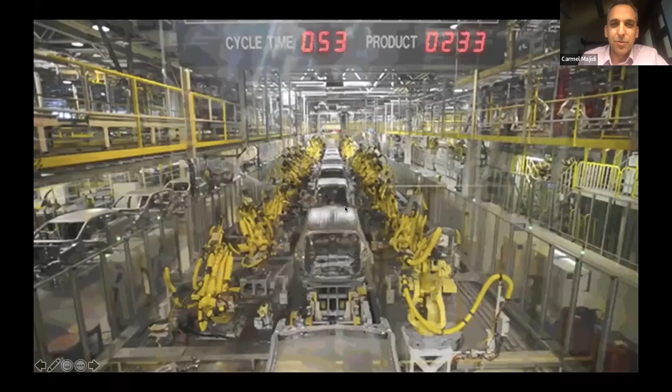So let me share my screen here and I'll get started with my presentation. I want to just start by saying that this presentation is going to cover soft robotics at a fairly high level.

I'll sprinkle throughout some of the work out of my research group. At this point, soft robotics, or what we term 'soft-botics' here, is really a global initiative, and CMU is one of the leaders in a lot of the pioneering work. Even since the inception of a lot of the current efforts in soft robotics, that happened here at CMU. I'll talk about how some of the work out of CMU weaves into this, and John mentioned the new Scaife building, so at the end I'll also talk about how central that's going to be for accelerating a lot of the work we do in this domain.

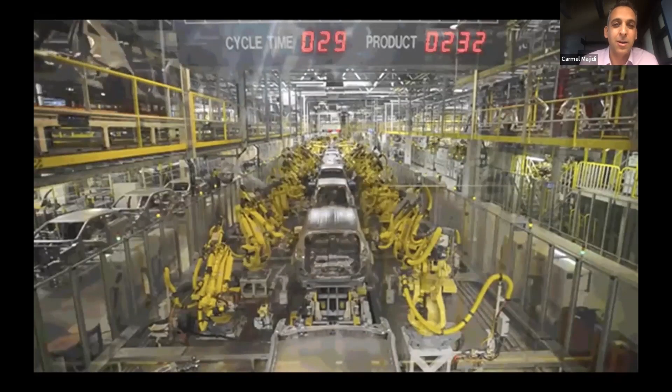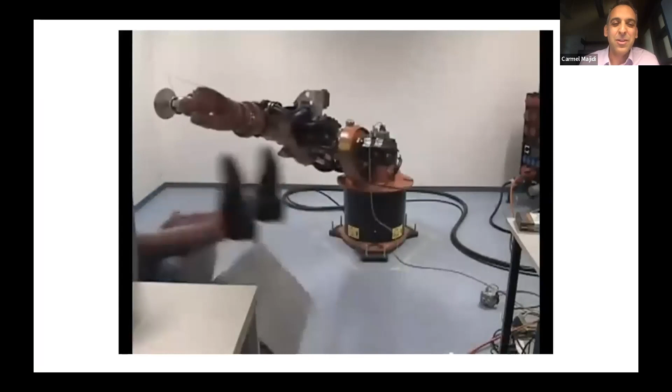Soft robotics, robotics as we know, has a central role in a lot of different industries in our economy. They're absolutely critical, vital for a lot of what we do. A lot of these machines, these robot arms you can see here, are highly well engineered for the tasks they're designed to accomplish. Now, of course, these are pretty bulky, load-bearing, powerful systems. Oftentimes they work behind cages. You certainly don't want these in close proximity to humans. You definitely don't want these robot arms in your kitchen, right? These are really not designed for interactions with humans in a close proximity role or an assistive role.

And really that's where soft robotics and this concept comes in. Can we re-engineer machines and robotics that are used in automation in a way that they can actually be more engaged in our daily life? So engineer them in ways that they can assist with mobility, that they can aid with human-computer or human-machine interaction. We can use these for healthcare, for health monitoring.

When we explore the role of robotics for applications that require intimate contact with the human body, we're faced with a lot of challenges in the materials domain. When we think about robotics, we think about many disciplines, not just hardware, but also AI, computer vision, and the more algorithmic sides of robotic systems. But there are also materials challenges that emerge when we interface these automated systems with the human body.

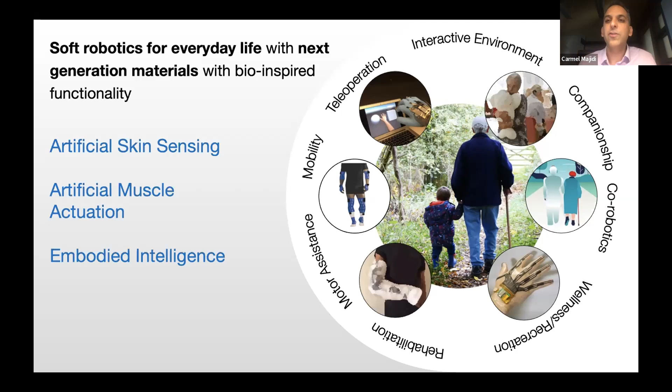We want to think about next generation material systems that function like artificial sensing skin, artificial muscle, or artificial nervous tissue for embodying intelligence within these systems. Of course, the big challenge is that existing materials used in engineering don't have any of these functionalities. They're for the most part passive from an actuation standpoint.

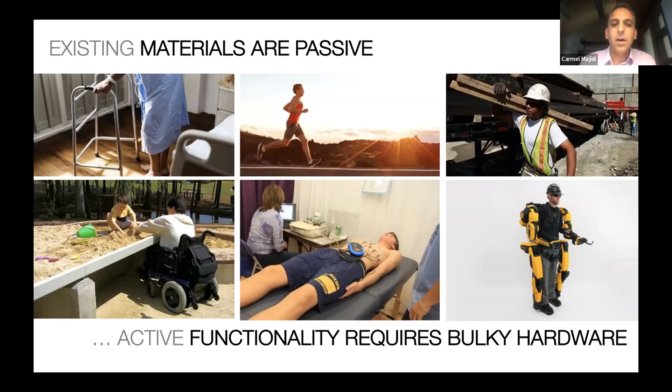They can be load bearing, or we can use them in garments to provide comfort and protection. But if we want to engineer any kind of electronic functionality, any kind of robotic or actuator type functionality, we end up with systems that are quite bulky and not compatible with everyday life. If you think about everything from mobility to wearable electronics, like you can see here in the bottom middle panel, these are devices that would interfere with our ability to do day-to-day tasks.

This introduces a new paradigm in engineering, which I call soft matter engineering. This is something that in the earlier days of soft robotics I was advocating as an important pillar of this field, and that is to really rethink the types of materials that we use in engineered systems.

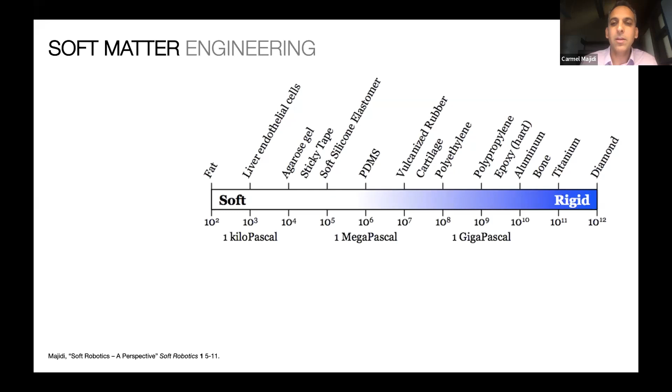One way to think about materials and their compatibility with the human body and our natural day-to-day activities is to think about how stiff these materials are. How much force does it take to stretch these materials? Or alternatively, if we put these materials in our clothing, or in robots and machines that we interact with, how much force do they push back with when we come in contact?

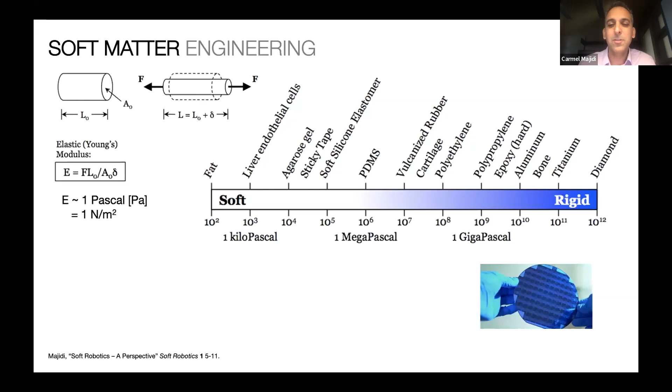The reality is that most engineered systems use materials that are orders of magnitude stiffer than the soft, squishy materials that make up our body. That's what makes a lot of automated robotic systems quite dangerous for physical contact with humans. This vast mismatch in stiffness between the hard plastics, metals, semiconductors, and hard case packaging that goes into conventional hardware versus the soft squishy tissue that make up our body.

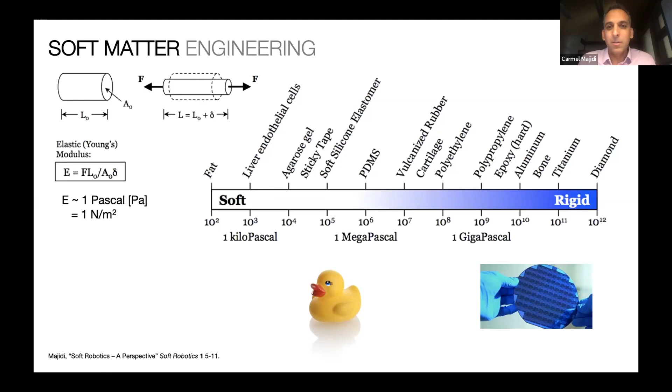The goal here is to carefully re-examine the types of materials we use to engineer systems, and see if we can achieve a lot of the same robotic, computing, and electronic functionalities that we historically achieved using rigid materials, but instead using soft materials: rubbers, gels, granular materials, things like sand or powders or fluids.

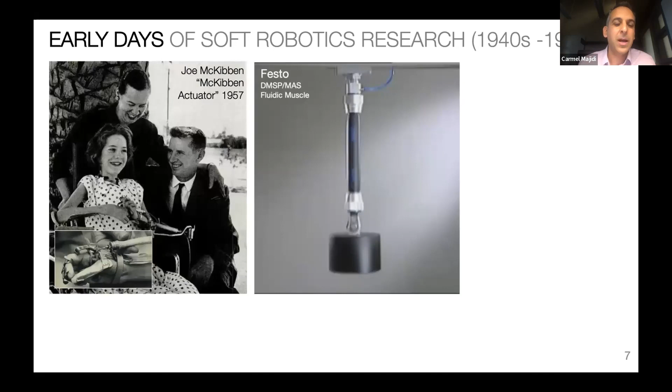A lot of the early, pioneering work in soft robotics actually started out here at CMU. However, if you really want to make a stretch, you could argue that the inception of soft robotics goes back many decades, to the 1940s and 1950s, with a lot of the early work using pneumatics in automation and robotics.

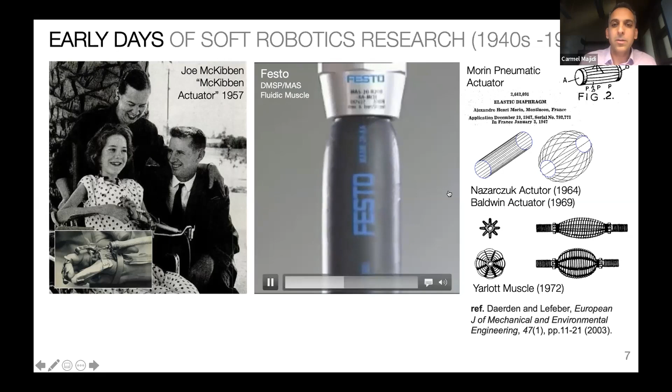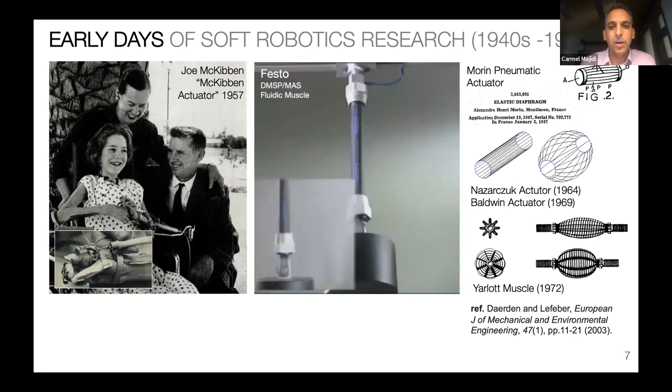There's a really long history of using basically balloon inflation and pneumatic power to create these fairly simple and somewhat rudimentary linear actuators that have been used for applications like robot arms, and also in industrial automation with conveyor belts and hoppers, but also, as you can see here on the far left, using these soft pneumatic robots for a hand exoskeleton.

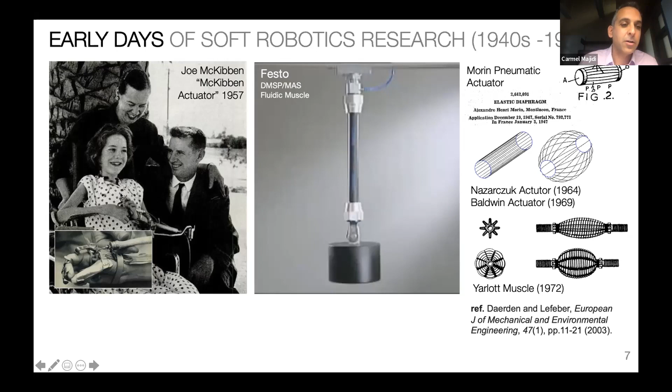This is actually Joe McKibben, a physicist who's credited as being one of the pioneers of soft robotics. He built this hand exoskeleton using pneumatic actuators for his daughter, who was suffering from motor disabilities.

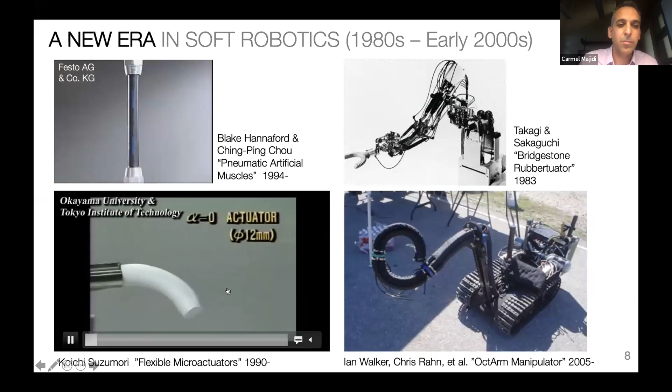In the decades since, there's been an expanded look at these different types of pneumatic actuators for different applications - mobile robotics, robot arms, industrial automation - looking at different form factors and shrinking these down. Within the past two decades, we've seen tremendous growth in institutional funding for soft robotics, basically a rediscovery of these types of soft material systems for applications in robotics. That leads us to where the field is today.

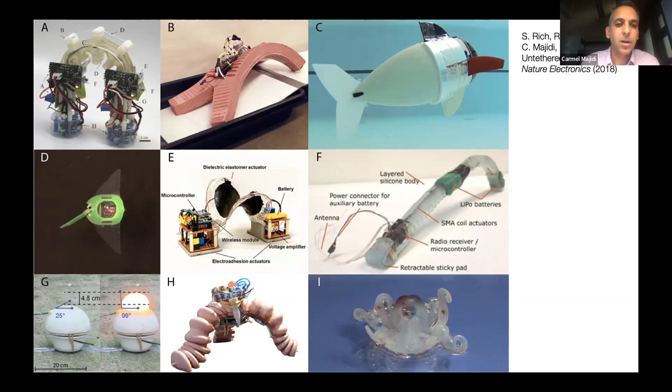There are all sorts of really exciting approaches and designs to building machines and robots that don't use any motors, none of the conventional hardware we typically associate with motorized systems and automation. Instead, they use alternatives to motorized actuation. Pneumatics is one, but there's a host of other actuator technologies out there. I'm going to go through these rather rapidly, just to give you an overall flavor of the current state of the field and the methods used to power these systems so they can have robot functionality while still being made primarily out of soft, squishy materials - safe for contact with a human and able to mimic the properties of soft natural organisms.

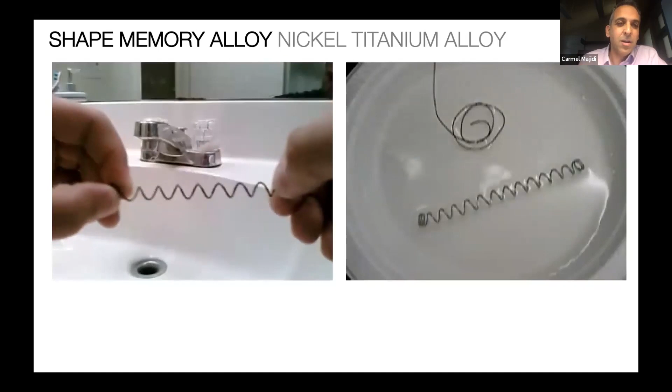I'll start with shape memory alloy. That's been a really popular material in soft robotics. Some of you might already be familiar with materials like nickel titanium that have this shape memory effect. At room temperature they're quite compliant and deformable, but when you heat them up, they spontaneously go back to their original shape.

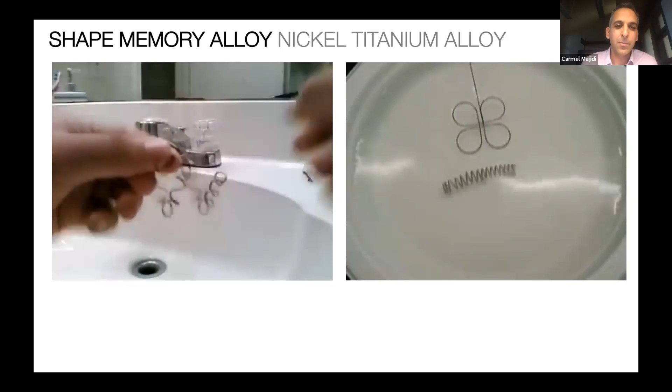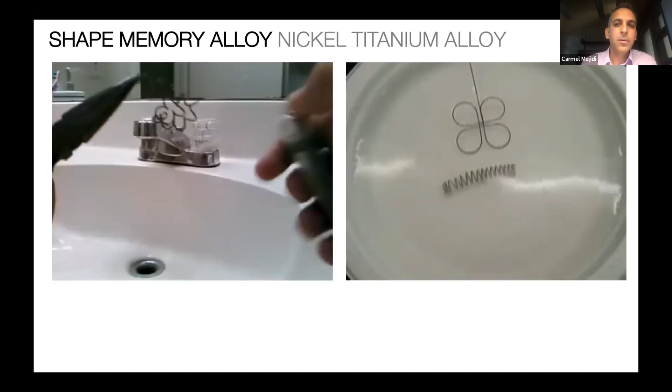You can see this in the video here on the left. It's very malleable - you can deform it, uncoil it - and then when you bring a flame to it and it heats up, the material had memorized its previous crystal structure and spontaneously goes back to that shape upon heating. The wire remembered that it was a coil and goes back to that shape. Heating is, of course, one way to do this - here we're showing the same effect in a hot water bath.

But the approach we take in our group and other groups throughout the world is, instead of using external heat, to use electrical input. We pass electrical current through that shape memory alloy, and through the Joule heating - the resistive heating from that current flowing through the wire - that's enough to create the temperature needed to induce this shape memory effect.

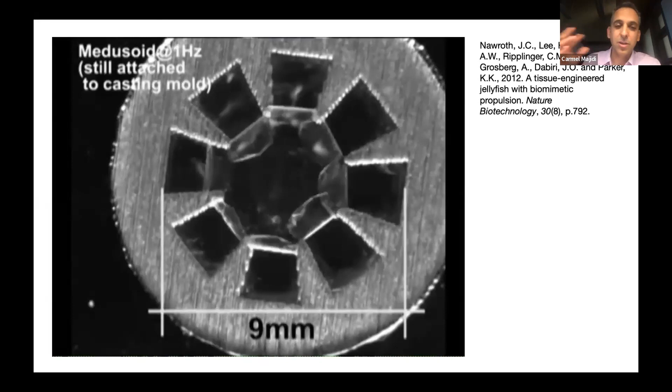Another really popular and exciting approach to actuation is to use biohybrid type systems - taking natural muscle tissue and combining it with soft materials to get robot motion. Adam Feinberg over in the BME department has been one of the pioneers in these soft biohybrid systems, combining natural tissue - in this case skeletal muscle from mice or cardiac myocytes and cardiac tissue from a rat's heart - and incorporating that into soft material systems to get these robots to move.

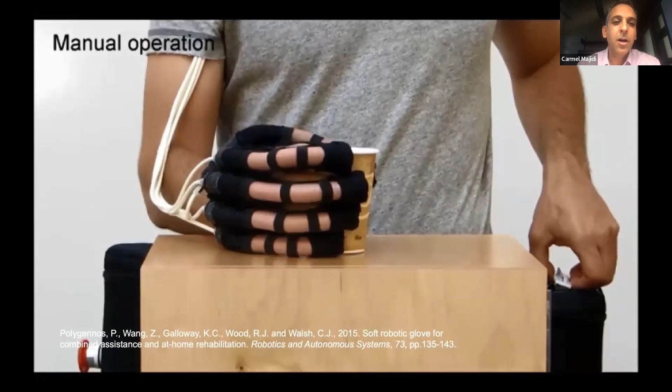I'll kind of breeze right through - we'll have time during Q&A to come back if you want to learn more about the details. I really want to highlight some of the applications of these material systems. As I said, one of the pioneers of soft robotics was a physicist, Joe McKibben, and what motivated him was to make a hand exoskeleton for his daughter. That continues to be a motivation for the field.

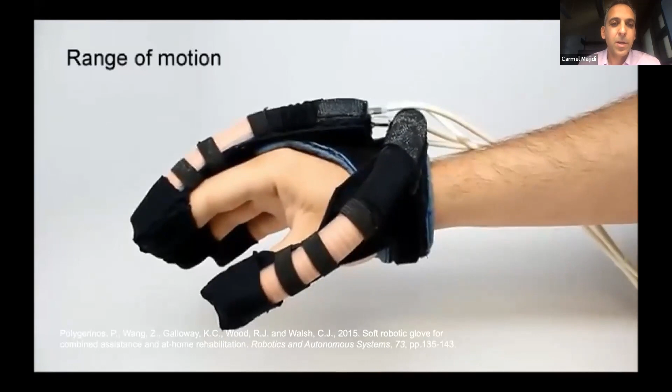This is work out of Harvard University, Conor Walsh, using these kinds of soft pneumatic actuators to assist in hand motion - this is really intended for rehabilitation and assistance for patients who suffer from motor disabilities.

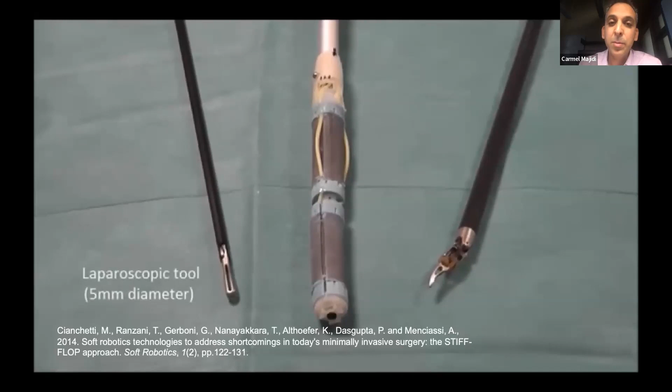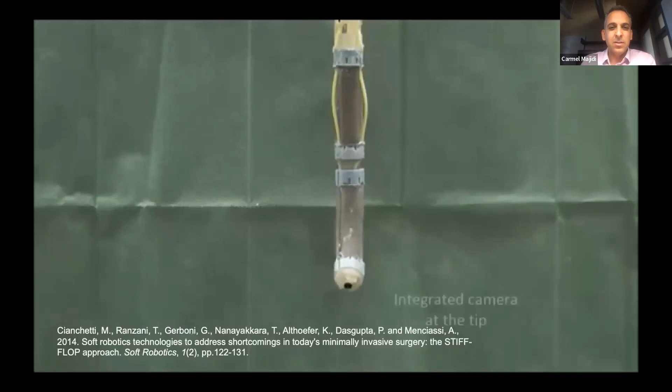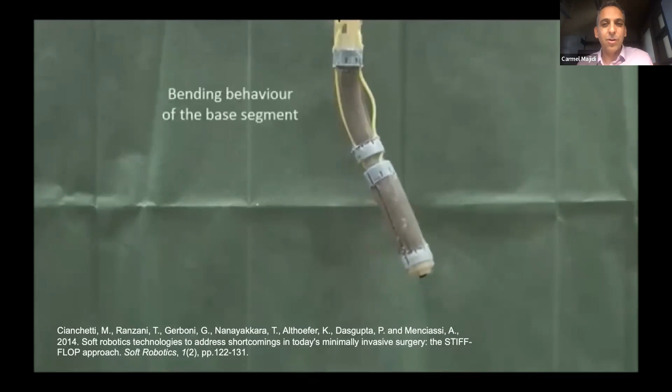Here's another video of using soft robotics for a medical endoscope. Minimally invasive surgery is another big motivation for soft robotics. Because these materials are soft and deformable, we can put them through arteries and have them in contact with organs without worrying about high stress concentrations that might arise from mismatches between the stiffnesses of the contacting materials. By using materials that match the stiffness of our natural arterial tissue and organs, we can reduce those stress concentrations and ensure safer contact.

And so these systems are still very much a work in progress.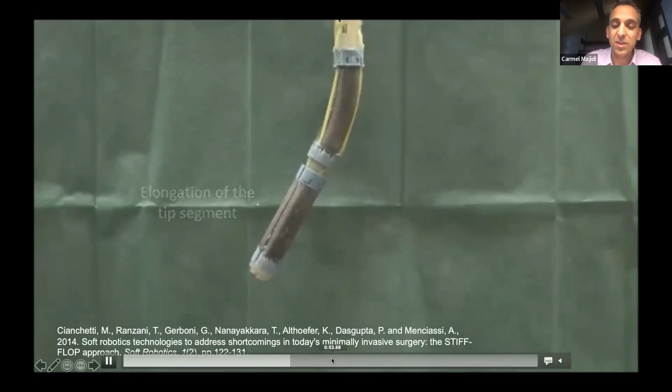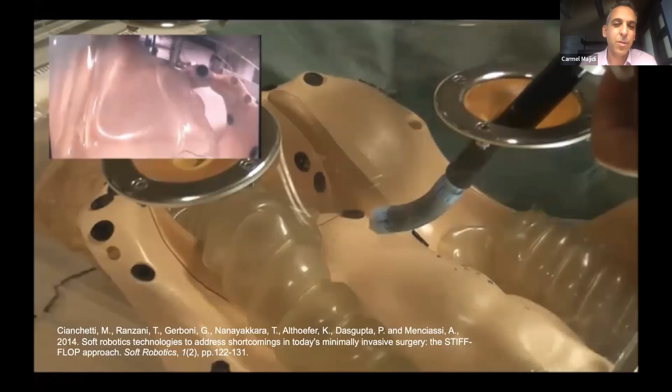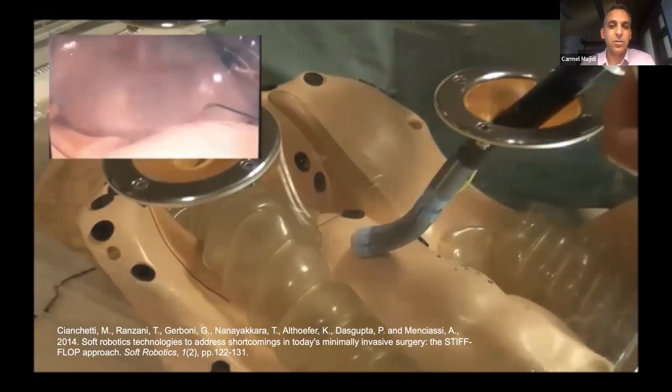I'm not aware of any actual surgical operations that are routinely being performed using soft robotics. Although there are every year millions of balloon angioplasty operations, and you could argue that those, in a sense, are a form of soft robotics because they also use inflation and soft materials.

In that case, to basically remove any plaque from arteries. Here's another example of a popular area of research exploring the use of soft robotics in medicine. This is work by Metin Sitti, who is a former member of the MechE department here at CMU. He's now at the Max Planck Institute, and he, along with plenty of others, have explored the use of soft magnets to create these little robots that can crawl around and move inside the human body.

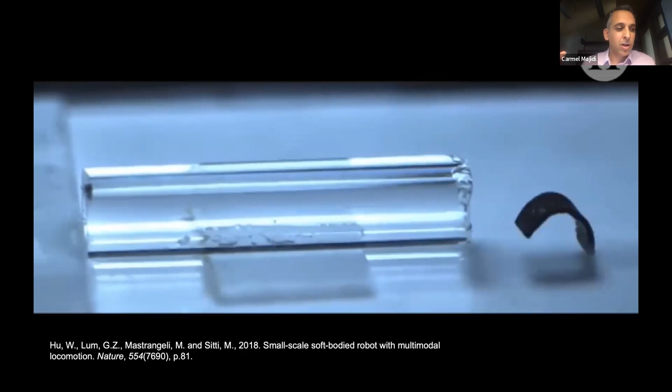What's special here is that we basically get this untethered type of interaction between these external electromagnets that are outside of the body, and then these kind of soft, rubbery magnets that can be placed in, say, in the stomach or in different arteries or organs.

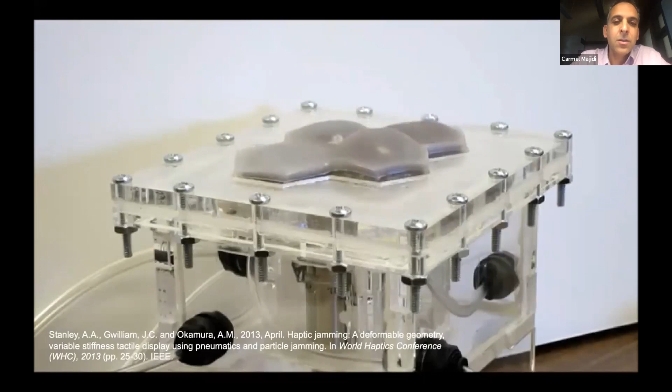This is just one of the last application demos here. This is work out of Stanford University using soft robotics for haptic interfaces. And this is something also that we're doing quite a bit of here at CMU. I think this represents one of the important application domains where soft robotics does offer some unique advantages over a lot of more conventional hard-cased electronic technologies.

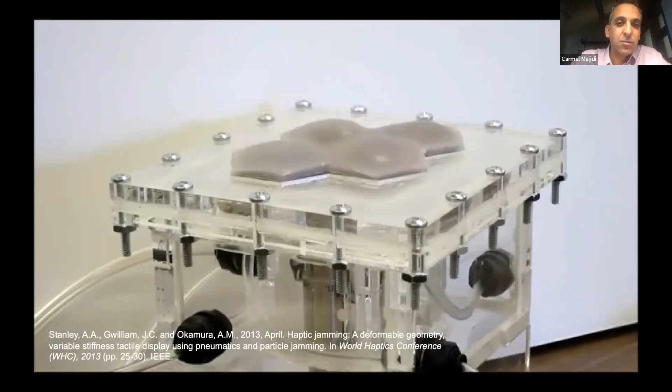Here, we're using pneumatic inflation, or I should say we're using pneumatics not just for creating shape change to create these different textures and surfaces for haptic feedback, but we can also use pneumatics for stiffness tuning. So if we put particles within these rubbery chambers, and if we apply suction, then that can actually cause those particles to compact in. And that's a way of achieving stiffness.

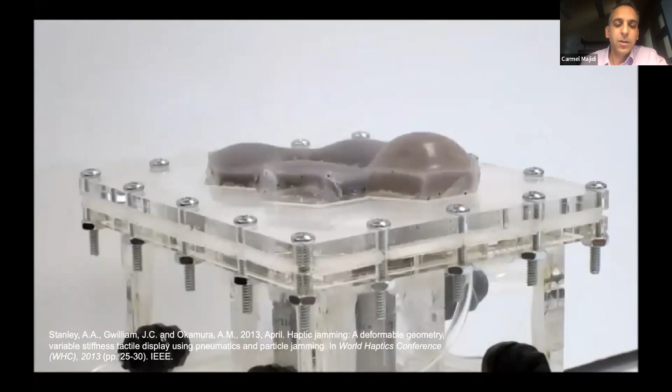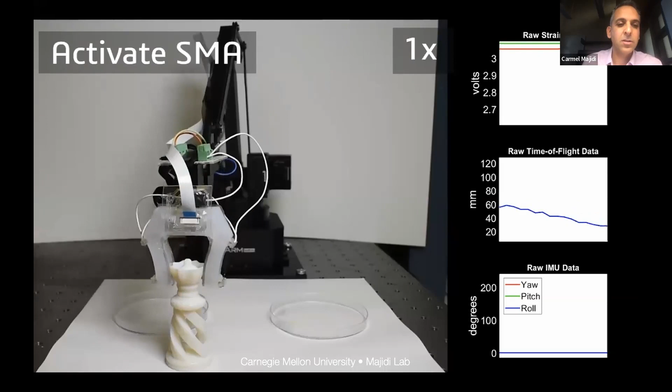And then this is just wrapping up to some work out of my lab where we're incorporating soft sensors into these robot grippers. Again, this one is powered using shape memory alloy. And by using these soft sensors and soft electronics, we can endow these soft robotic end effectors with this feeling of basically touch and a sense of proprioception, or a sense of motion and orientation.

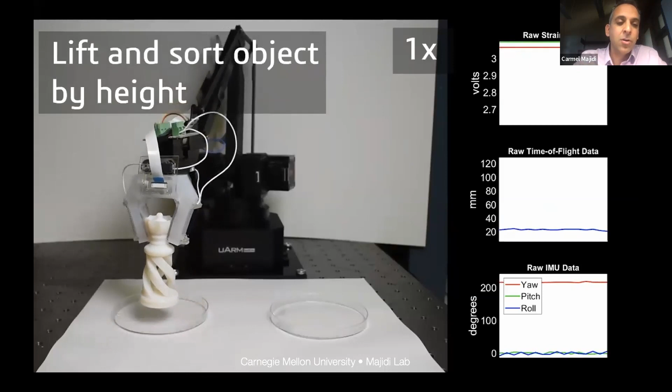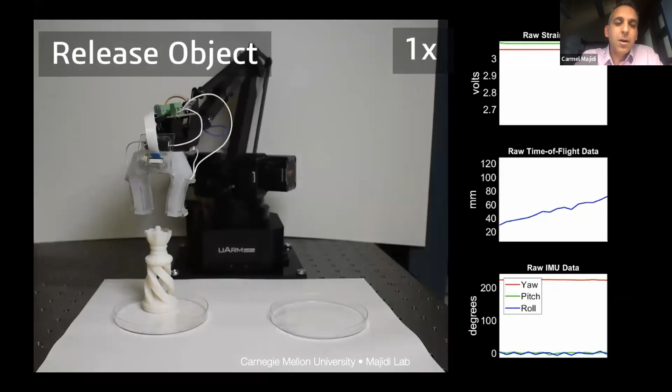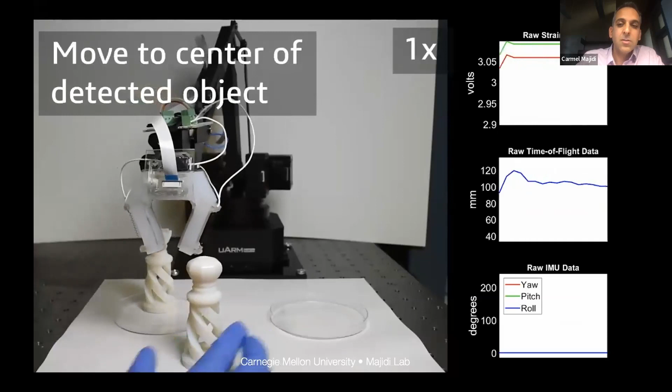So the types of electronics we use here are based on liquid metal. So instead of using just conventional copper or gold traces, we're using metal alloys that are liquid at room temperature. And so this allows for kind of fluidic circuits that can conduct electricity, that can themselves function like sensors, so in this case, touch sensors, but then we can also wire up different microelectronic chips like an IMU for measuring motion.

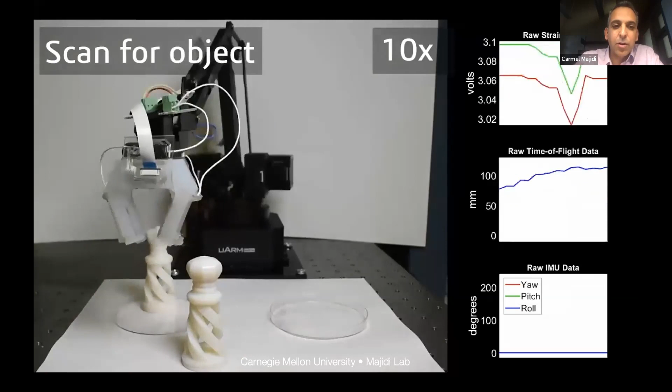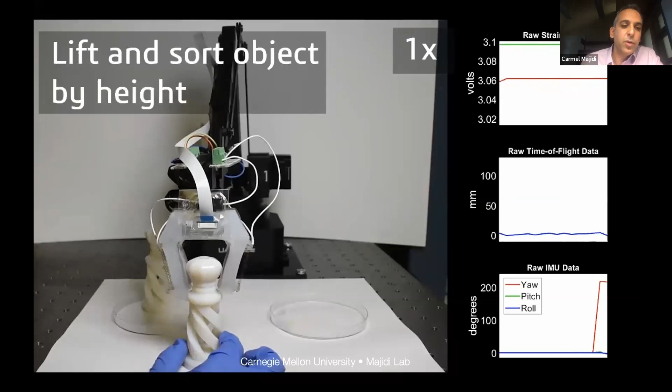We have a little light-based time of flight sensor to scan the location of objects. And by incorporating sensing into these soft robots, we can basically make them much more robust. And so when we introduce disturbances, if we say move an object around, or if we try to pull it from the grips, the sensors will pick that up and the robot will know to go and reattempt the grasp.

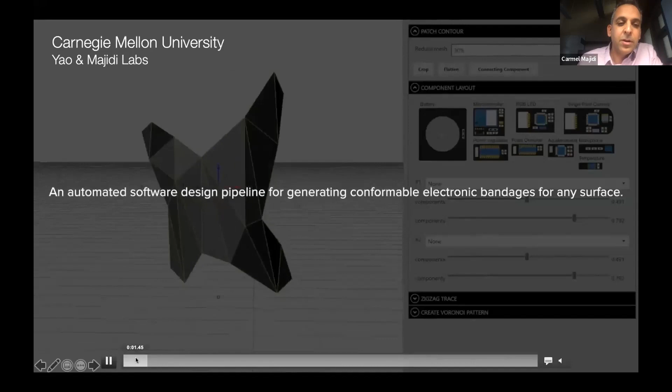Naturally, a lot of these soft and stretchable sensors and electronics are not just useful for applications in robot grasping. Here's just another video of work, this in collaboration with Lining Yao's group over in the HCI Institute, where together we looked at using a lot of the same material architectures and manufacturing methods used in soft robotics now to create these kind of sticker-like sensing electronics. I'll just kind of skip ahead here.

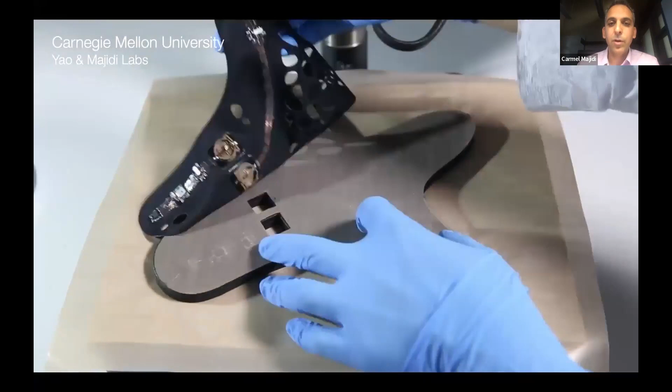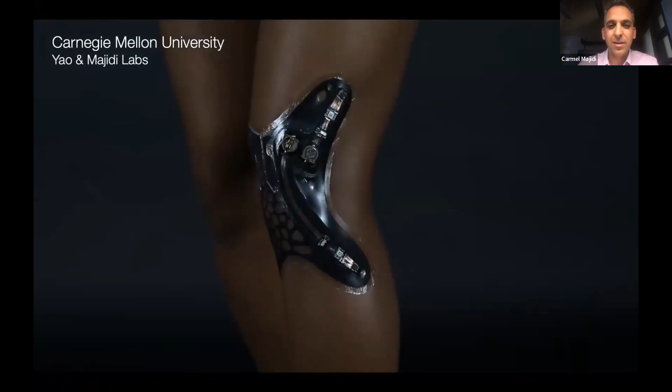That can be used to basically create these kind of fully wireless circuits that we just adhere to the body, and we can use for all sorts of different modes of physiological sensing. So here's just an example of a sticker. It has its batteries, it has its microcontroller, it has a Bluetooth radio, and then it has IMUs, so we can track, say, the motion of the knee.

The electronics themselves are quite robust, quite stretchable, so we can put them into garments, we can put them on our skin, we can move around, and they don't really interfere with our natural motion. The electronics will stay intact. And we can incorporate acoustic sensors. If you want to, say, track food intake, we can put temperature sensors, pulse oximetry chips. There's a whole range of different types of sensing modalities that we can engineer into these.

So I have about 5 minutes left, and I'm going to spend a little bit of time just talking about the impact of this field and also kind of translation into the commercial and entrepreneurial space. And John, in the introduction, he kindly mentioned just some of the translational work that my own group is doing.

So I wanted to end by talking about some of the stuff that we're doing with commercializing some of the technologies that we're developing here at CMU.

From an academic standpoint, there's been tremendous growth in the field. If we just look at the number of research publications a year, that's been growing almost exponentially, and it really has picked up over this past decade, once a lot of institutional funding agencies like the National Science Foundation and DARPA stepped in and started really focusing on this as an emerging field.

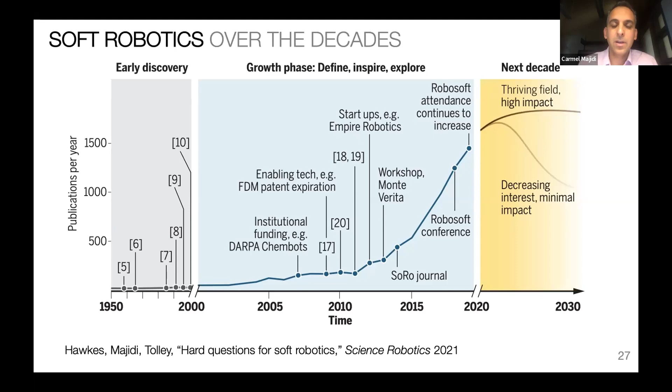We can also look at international conferences and the emergence of journals focused on this theme of soft robotics. It's been an incredibly productive and successful time period for a lot of faculty.

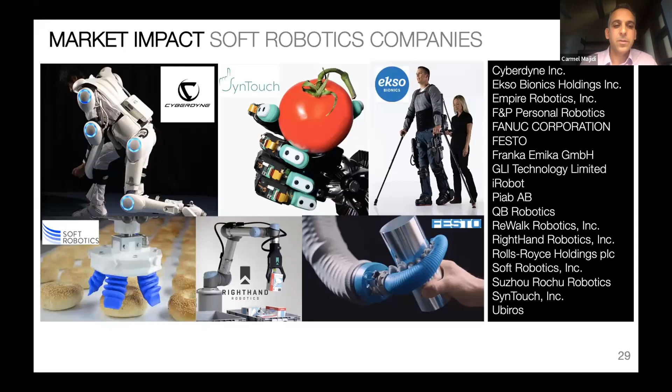But more important, it's also created tremendous opportunities for companies, both established companies as well as startups, including CMU spinoffs, that have found ways of harnessing a lot of these soft robotic technologies and soft electronics to start making real world impact, from human motor assistance through wearable devices and exoskeletons, all the way to different types of uses of soft robotics in industrial automation and robot grasping.

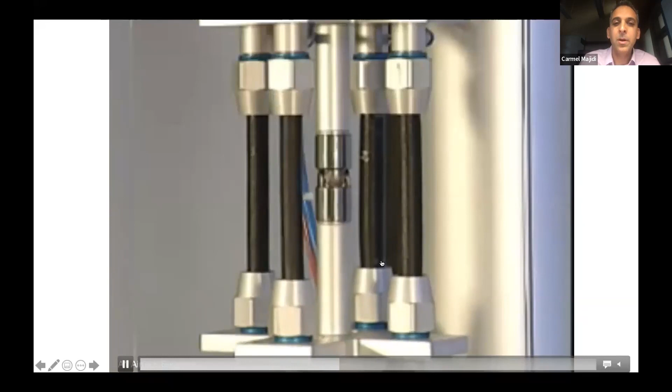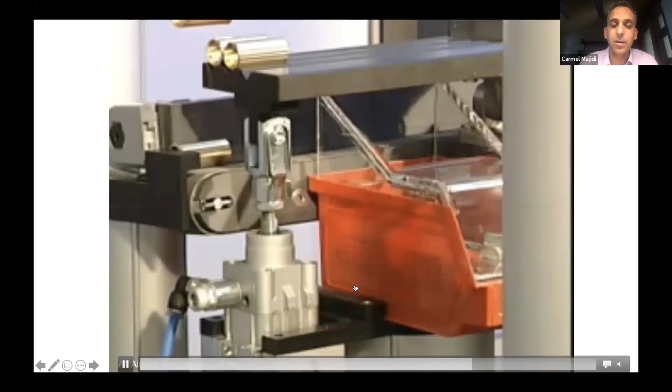I'll just show a few highlight videos here. This is using more traditional pneumatic actuators that have been around for a few decades now. I'll skip ahead here—this is used for this precision stage. These pneumatic actuators have force-controlled motion of various end effectors used in automation. Systems like this are being used today in industry.

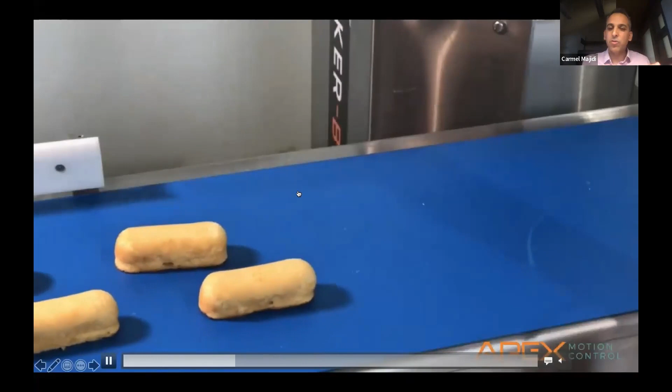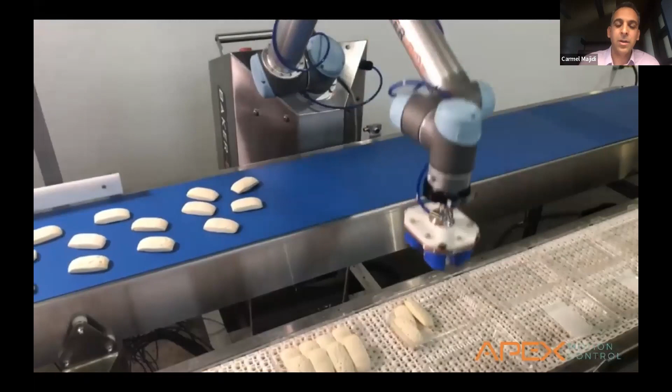Something that's been growing in popularity lately are these kind of soft robot end effectors. Instead of using those more traditional pneumatic actuators I showed you in the last video, they have these rubbery, soft fingers used primarily to perform pick and place operations on very delicate objects—like baked goods and ripe fruits, things that would otherwise get crushed if you tried to handle them using a parallel plate gripper.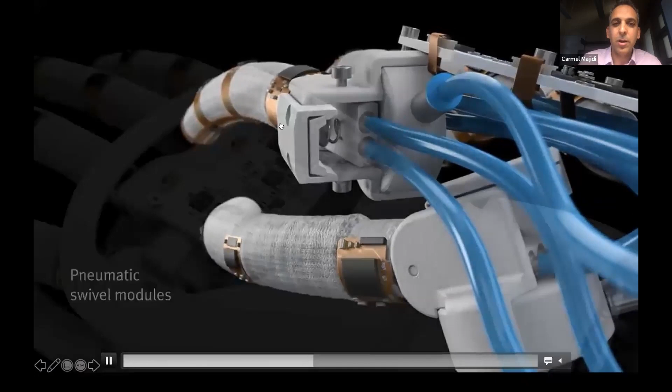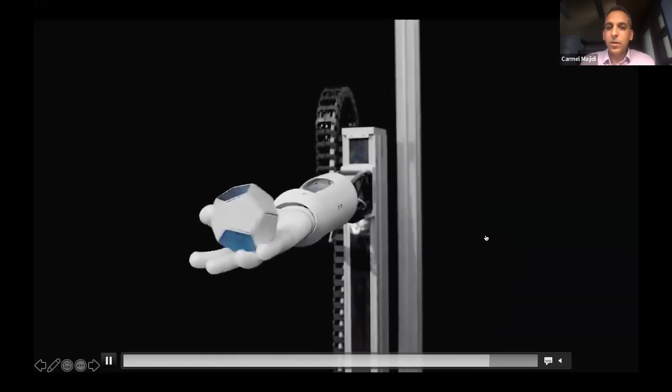Let me just kill the audio on this. This is from a company based out of Germany that's really pushing the envelope in terms of integrating soft robotics and stretchable electronics and sensors for creating these kind of bio-inspired robotic systems. I'll skip ahead so you can see the robot at work. By moving away from motors and conventional electronics, we can start engineering robotic systems that are quite compliant, soft, and lifelike.

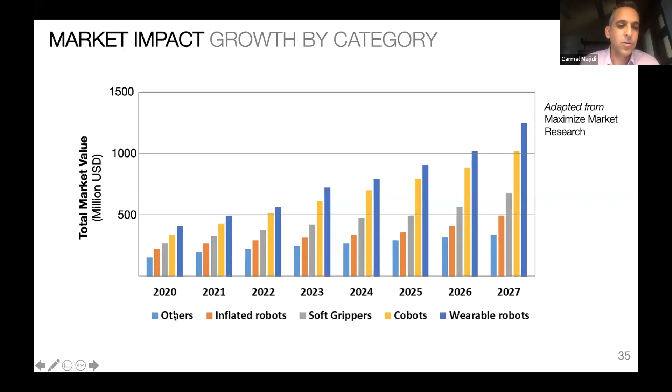In the interest of time, we have about a minute and a half left, so I'll gloss over these, but there are a lot of different market studies out there that predict quite a bit of growth within this field. A lot of that is going to be driven by the use of soft robotics within wearables, also in industrial automation and grippers. There's also this other category that relates to the use of soft robotics in medical applications.

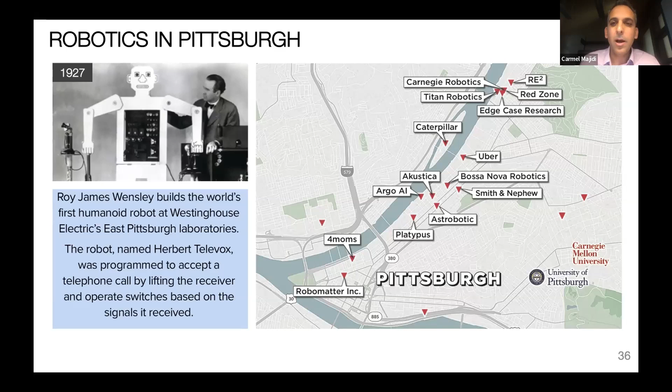Pittsburgh, of course, is a hotbed of entrepreneurship and translation of a lot of robotics technologies. I'll wrap up by highlighting some of the work out of my own group.

These are just spin-offs, all based here in Pittsburgh. They're still fairly young companies, all in the pre-revenue stage, meaning they get most of their funding either through VCs or through government funding agencies. But still, even though they're very early, these are initiatives I'm really excited about, and they've given my former lab members an opportunity to find practical uses and impact for their work.

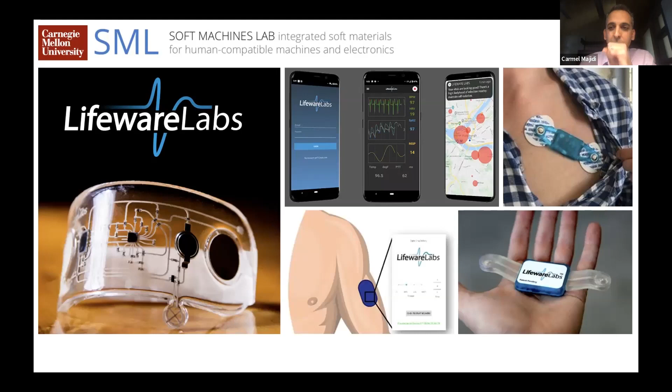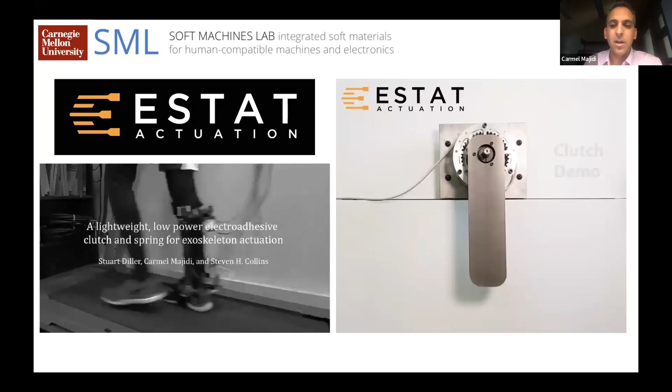Lifeware Labs is one, working on these sticker-like wearable electronics. Arieca is doing a lot of interesting work using the liquid metal I mentioned before to tailor the thermal and electrical properties of soft materials. And then lastly, ESTAT Actuation, which is looking at exoskeletons and wearables and ways we can make these more lightweight and high performing.

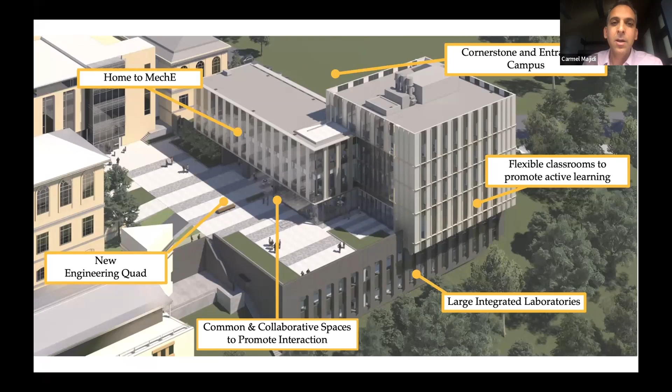And John mentioned new Scaife, and that's going to be a real game changer, I think, for a lot of the work we do, not just in my lab but across the university in this space of soft robotics. This is going to be a really beautiful space. Hopefully a lot of you will get a chance to visit soon.

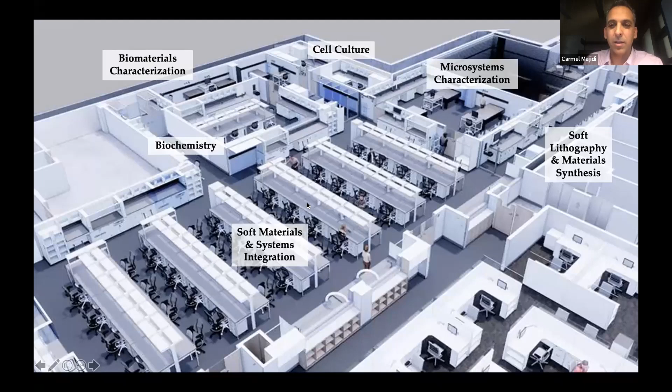The new space when it's completed—here's just a snapshot of what some of the shared resource lab spaces are going to look like. So a really exciting opportunity to not just do a lot of the soft robotics synthesis and characterization work, but also work with folks within the MechE department and across the college on biohybrid systems, tissue engineering, biochemistry, and these more advanced, emerging types of applications. So I'll leave it at that.

I'm a little bit over 20 minutes, so a lot of great prospects and a lot of open questions that remain for the field. Thank you so much.